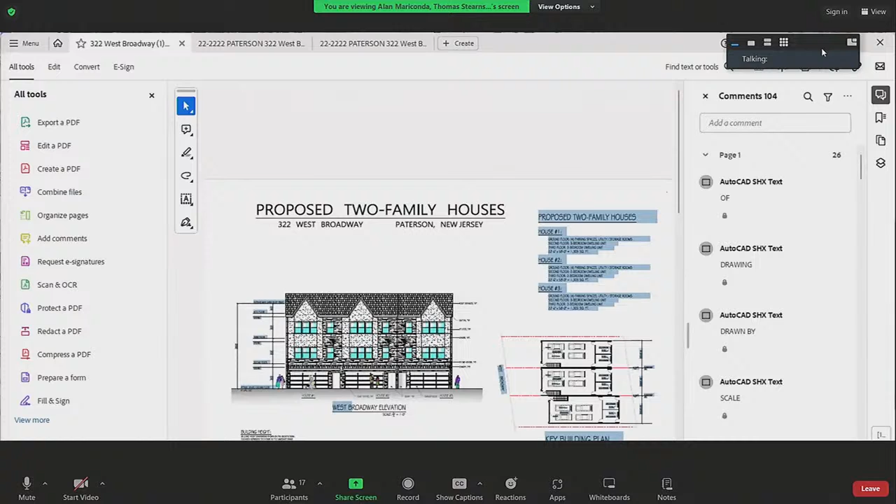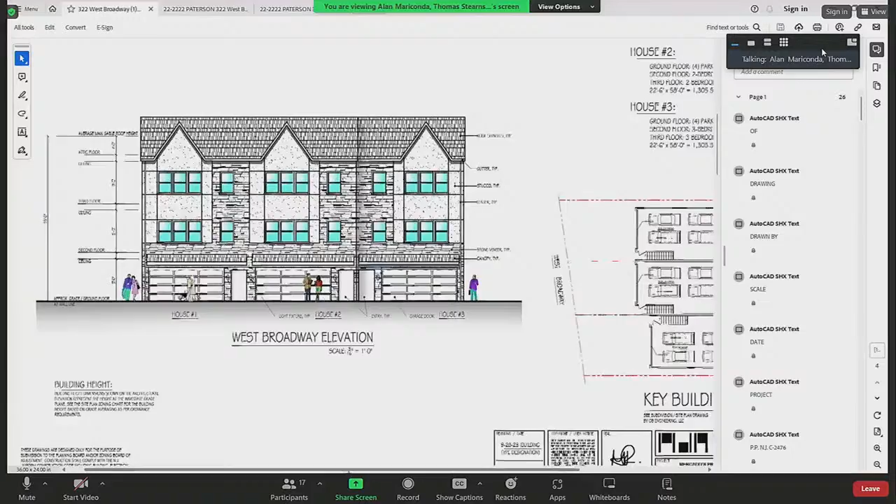Commissioners, you're looking at the first sheet of a set of drawings dated 11/15/22. Sheet number 1 shows the front elevation of the structure itself. There's actually 3 individual 2-family houses attached, as you're seeing what we have now. On that drawing, in the lower right-hand corner, you'll see a key building plan. Mr. Stearns is here and will later review the site plan itself, but this key building plan shows the 3 two-family houses, labeled as house number 1, house number 2, and house number 3.

The property is on the east side of West Broadway, south of Burhans Avenue, and as Mr. Deutsch indicated, it's in an R2 zone. The property has 7,360 square feet of lot area. It's trapezoidal in shape, as you can see from the configuration of that key building plan, with respect to the red line Mr. Stearns is showing right now.

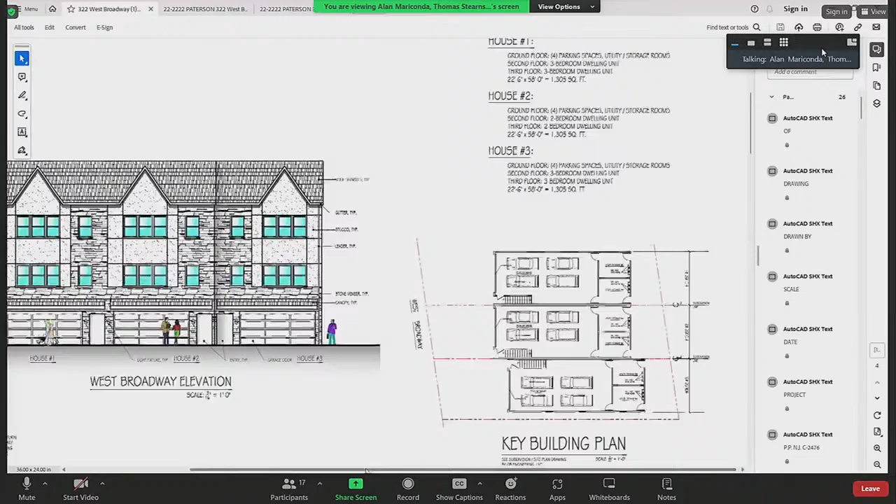You can see from the front elevation we are providing a 4-car garage for each of the 2-family homes. There will be 3 stories, as shown on the drawing. The total height is 35 feet, which does satisfy the height allowance in the R2 zone.

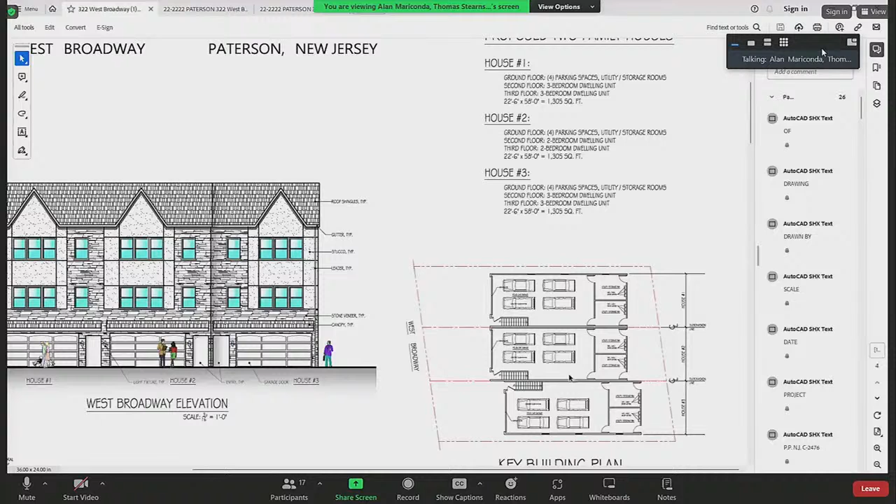As you can see from the summary on the upper right-hand corner of the sheet, we are proposing two-family houses, with a description of house number 1, house number 2, and house number 3. It's a combination of 2-bedroom and 3-bedroom apartments. The interior two-family house, house number 2, which is in the middle of the two outer ones, will have 2-bedroom units on each of the second floor and third floor. So that's what the front elevation looks like.

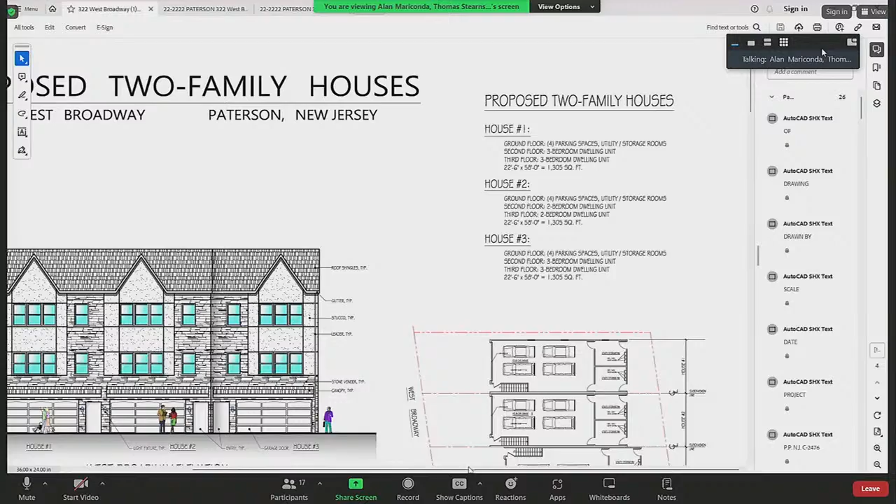You'll see that we are providing a stone veneer with a mixture of stucco as well. The roof will have typical asphalt shingles, as you can see from the drawing itself.

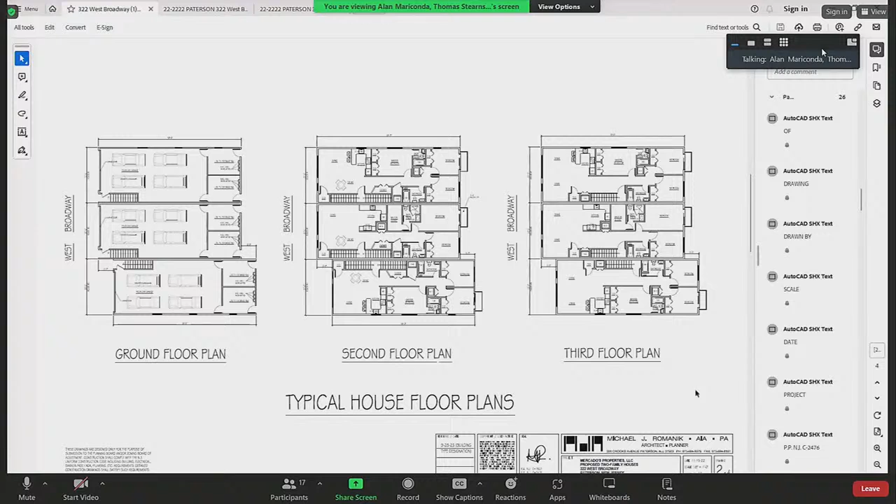Commissioners, if you turn to sheet number 2, you'll see the typical layout of each of the levels. To the far left is the ground floor, and as Mr. Deutsch indicated, each of the two-family houses will have 4 cars within the garage itself. There's also a rear area with exterior doors leading to the rear yard, which will accommodate utility and storage areas for each of the tenants.

The second floor, shown in the middle diagram, shows the apartment located on that floor. As you can see from the notations, the end units, house number 1 and house number 3, have units on the top and bottom that are 3-bedroom units, while the two-family house units in the middle will have 2 bedrooms. The 3-bedroom apartments have 2 bathrooms, with a master bath for each of the primary bedrooms.

The HVAC utility closets are contained within the apartments. There's a combined kitchen, dining, and living area, as you can see on the drawings, and the bedrooms are sized nicely, Commissioners. The third floor is very typical to the second floor, having the same functions.

Each two-family house is dimensioned with a depth of 58 feet by a width of 22 feet 6 inches. On sheet number 3, you'll see larger floor plans showing the dimensions of all the rooms. On the upper part of the sheet is the typical 3-bedroom apartment on the left side. The primary bedrooms also have a bathroom, as well as a common bathroom that serves the other 2 bedrooms and any guests that come to the house.

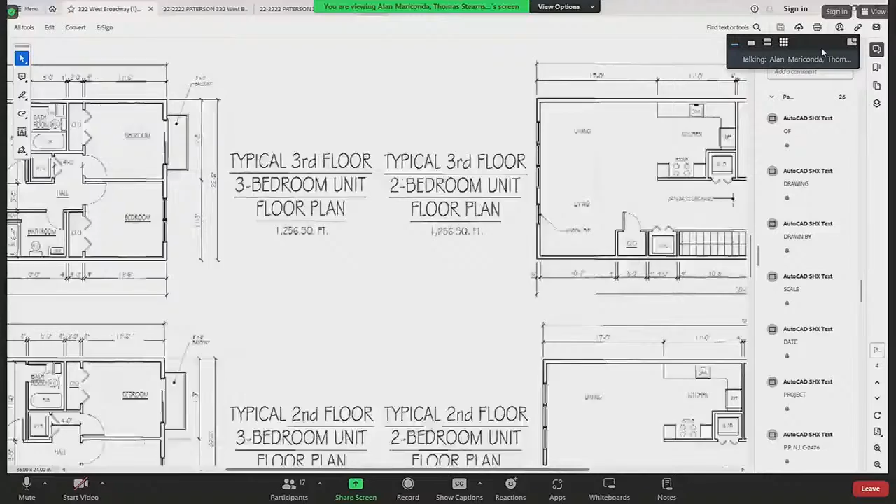The kitchen is combined with the living and dining areas, and there's a larger diagram showing the HVAC on each of the floors. Commissioners, on the right-hand side, you'll see the typical 3rd floor 2-bedroom unit, because that's the unit in the middle, so it only has 2 bedrooms. Unlike house number 1 and house number 3, where you have 3 bedrooms because of the exterior exposure to the outer part of the property.

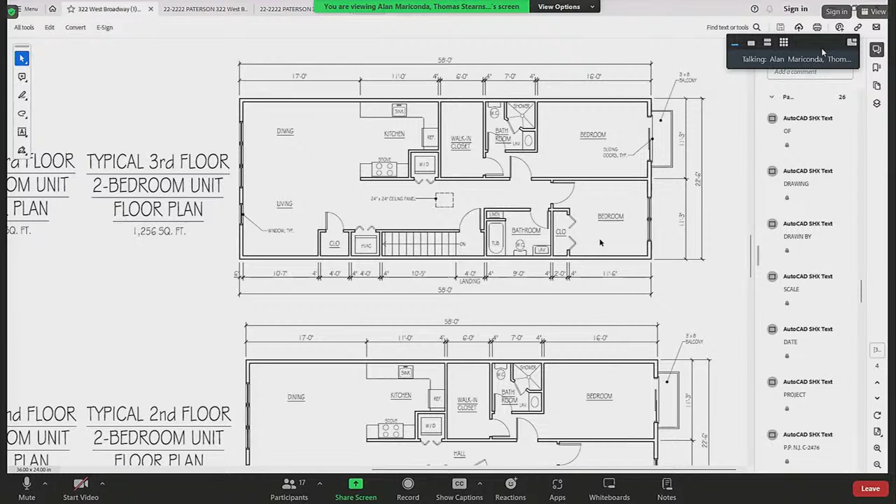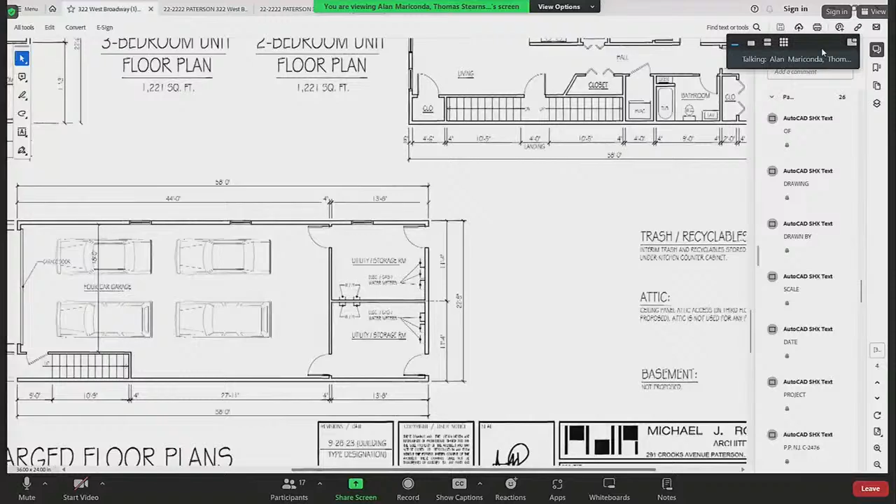Looking at the lower diagram, Commissioner, you'll see that the garages accommodate 4 parking spaces for 4 cars. The garage width is 16 feet, a normal 2-car garage width. To the right side, or the back of the garages, there's a storage room that serves each of the units on the 2nd and 3rd floor. So they have their own specific parking, plus storage and a utility room with the meters, as shown on that diagram.

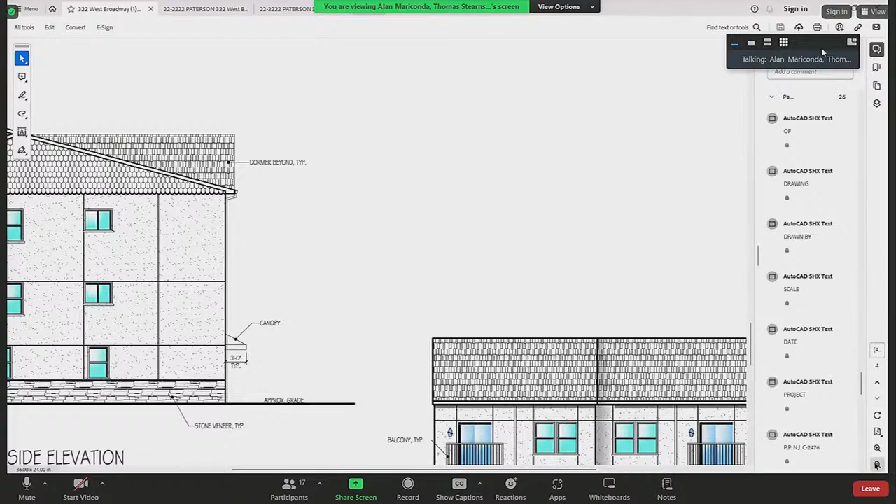The access is towards the rear. There's an exterior door on each of the ground floors of the 2-family houses. That's essentially the layout, Commissioners. Again, the size of each 2-family house is 58 feet deep by 22 feet 6 inches.

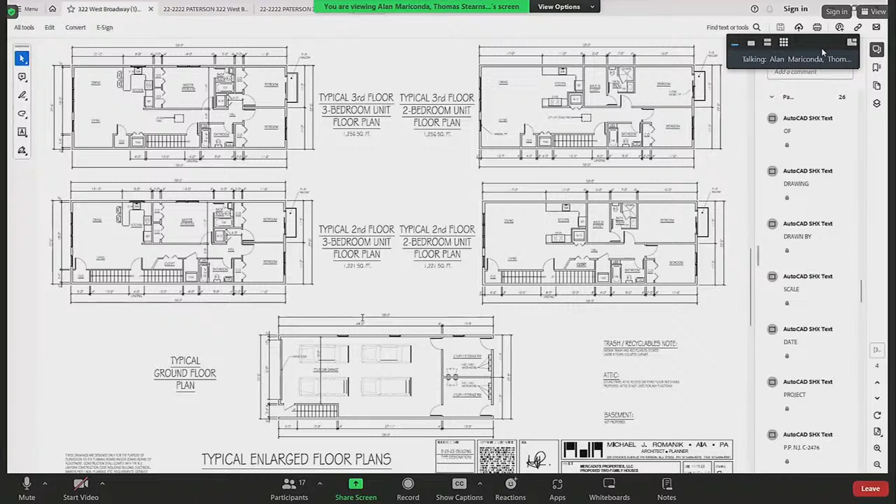Turning to sheet number 4, Commissioner, you'll see the elevations - views of the other sides of the structure as well as the rear. Looking at the diagram on the far right, you'll see the rear elevation, which has the exterior doors that lead from the utility rooms and provide access to the backyards of each of the 2-family homes. We are also providing balconies on the second and third floor apartments, as you can see from that diagram.

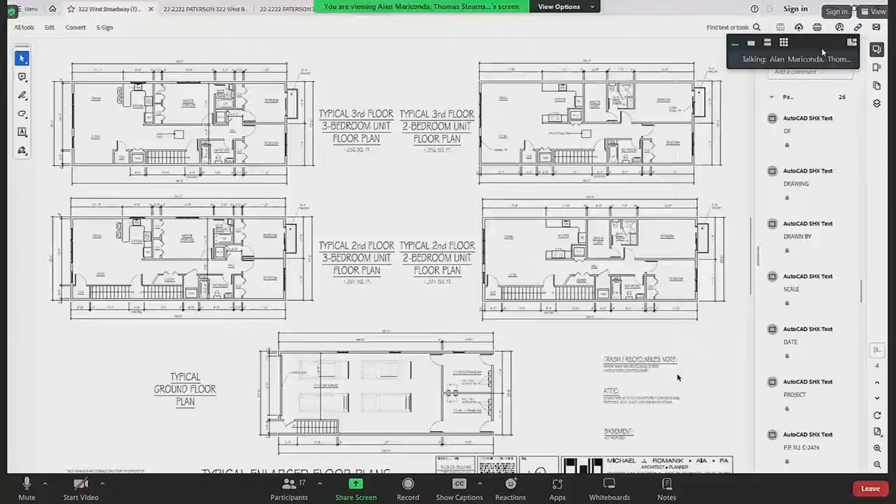Is that usable open space in the rear? Yes, it's not very deep, however there is some open space in the back which can be used as a sitting area and a play area. You'll see from Mr. Stearns's site diagram that house number 3 actually has more of a backyard than house number 1.

The property, as you can see, is shaped like a trapezoid, more like a rhomboid actually, and it's skewed. So you have property lines that are parallel, but they're shaped unequally - it's not 90 degrees. None of the property lines have 90 degree angles. So we are proposing a 3-lot subdivision. Each lot will have approximately 24 feet in width, with an area of about 2,400 square feet or so.

As I indicated, the lot area has a total of 7,360 square feet. So we try to position the units on the property, and Mr. Stearns will describe the easement.

All maneuvering of the cars backing out from the garage will be done on site itself. None of the cars will back out onto the street - it's not designed that way with the easement. There'll be a common easement where you back out fully on the property, then pull head out onto West Broadway. That was done for traffic reasons and congestion; we don't want to create any problem on the street.

So we feel having full access and maneuvering on the site would be beneficial for this particular site. We tried to position the buildings, as you can see on the diagram to the right, and we do have house number 3 offset more, just to give it some variety and take advantage of the trapezoidal shape of the property.

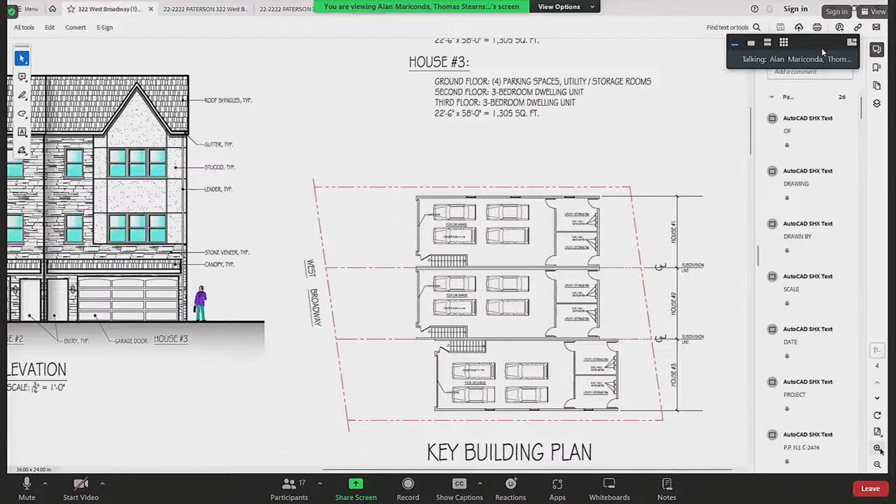So we feel this is a good project. We feel that the density is not high at all. It's based on other properties in the area which have small lots as well, many of them 25 by 100 feet. So we feel that this is most appropriate.

And the building that's on there now isn't the best shape, so we feel this is going to replace it with new housing that would be a complement to not only the neighborhood but the greater city as a whole. We feel that what we're proposing is very complementary as far as fitting into the character of the neighborhood, and again, the neighborhood is a 2-family zone, so that's what we're proposing: 3 2-family homes.

And the existing structure is either in need of rehab or demolition. It's not in great condition. Yes, that is correct. Okay, that's all we have, Mr. Romanik, at this time.

Madam Chair? She's muted. You good? Sorry, I was muted. Okay, I'm going to ask you to bring in and conclude Mr. Romanik's testimony, so I'm going to ask you to bring in Mr. Stearns.

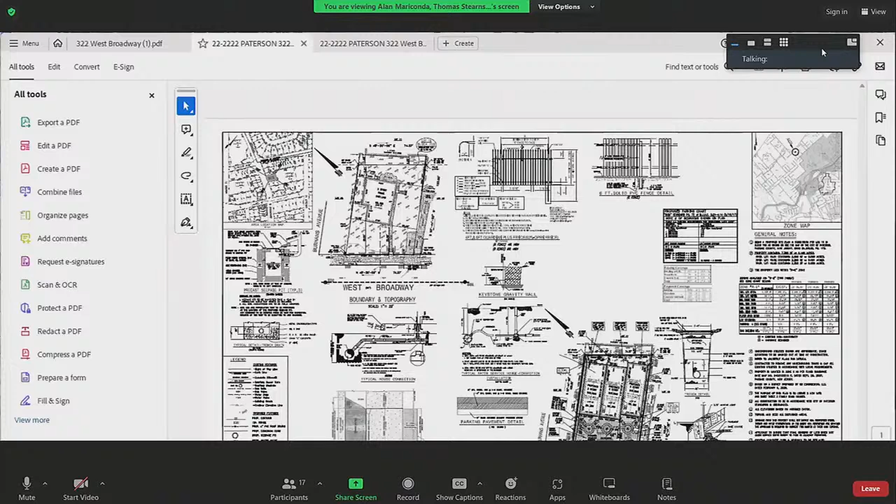Okay, Mr. Stearns, you've had the benefit of hearing Mr. Romanik's testimony and Mr. Deutsch's report, which you've reviewed. That's correct, yes. Could you give us an overview of your site plan at this time? Sure, first I'm going to share my screen, if I may. Can everyone see that? Yes. Okay, let's see.

So this is my site plan, originally dated December 27th, 2022, with the most current revision being 1/26/24, the 4th revision. As was described by Mr. Deutsch and Mr. Romanik, we're proposing a 3-lot subdivision. This lot is on the easterly side of West Broadway, lot 19, block 703, containing a total of 7,360 square feet. We're dividing it into 3 lots.

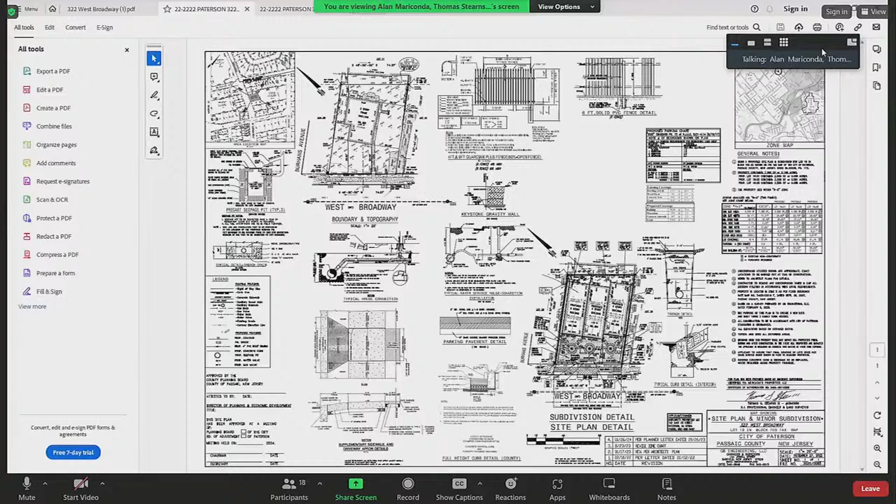The 2 outer lots are going to be equal at 2,555 square feet. The middle lot is going to be 2,250 square feet, the more narrow lot. The two outer lots are 25.82 feet in width, and the middle lot is 22.73 feet. As Mr. Romanik said, we're going to first subdivide these into the three lots, lots 19.01, 2, and 3.

We're proposing dwellings on each of these. As Mr. Romanik said, these are going to be 22.5 feet wide by 58 feet. For the positioning of these, we gave 3.05 feet as outer side yard setbacks on the two outer buildings, and the middle building's walls will meet, with fire rated walls on those.

The front, what we did to promote parking and maneuvering, we pushed the buildings back. So we have the closest front setback at 27.12 feet on our middle lot, and that will give us maneuverability for these cars to pull out of the garage. Then, as Mr. Romanik said, they'll be able to pull out forward onto West Broadway, which is a busy county road, so they won't have to back out into the road.

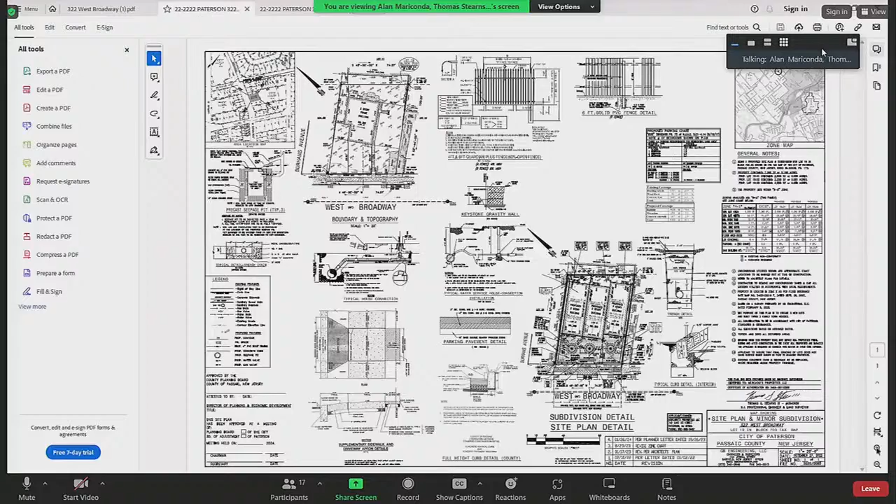We're also providing, on the first level, 4 parking spaces per unit, so we are fully compliant with our parking. The existing lot, just to go over briefly, I'll zoom in to the top left corner of the sheet. We had an existing dwelling, approximately 1,500 square feet, closer to the northerly side of the property. The grading on the site was relatively flat, going from 103 to 102, so a 1 to 2 foot grade change, which is relatively flat. There's no drainage facility on the site.

So there's the existing dwelling and driveway on the site, and any concrete features would run off onto the site and onto adjacent properties, mostly toward the rear, and some into West Broadway.

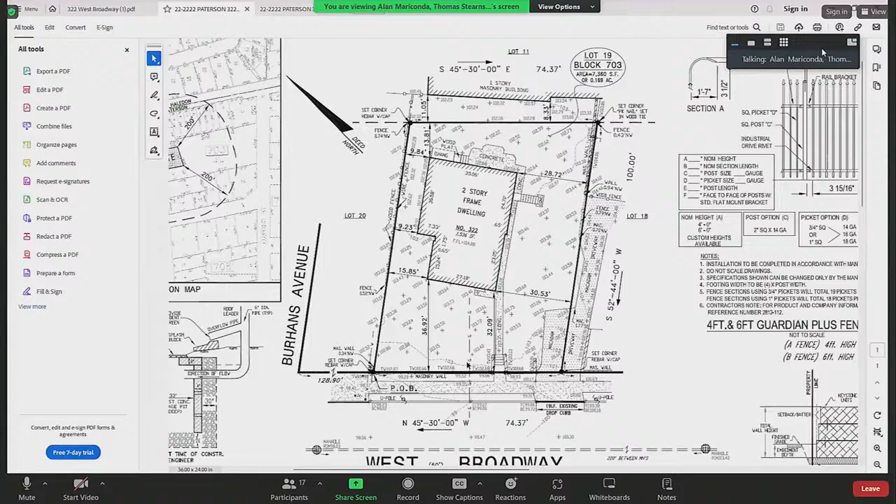So what the proposal is, I'll go down to my site plan detail. We're proposing 3,000-gallon seepage pits in front of each dwelling, one per lot. These pits will capture the entire roof runoff from each dwelling during a 2.5-inch storm. In addition, we're going to capture the turnaround maneuvering driveway in the front, which will be common to each dwelling. That entire driveway will be captured with a trench drain, so no water will go into West Broadway.

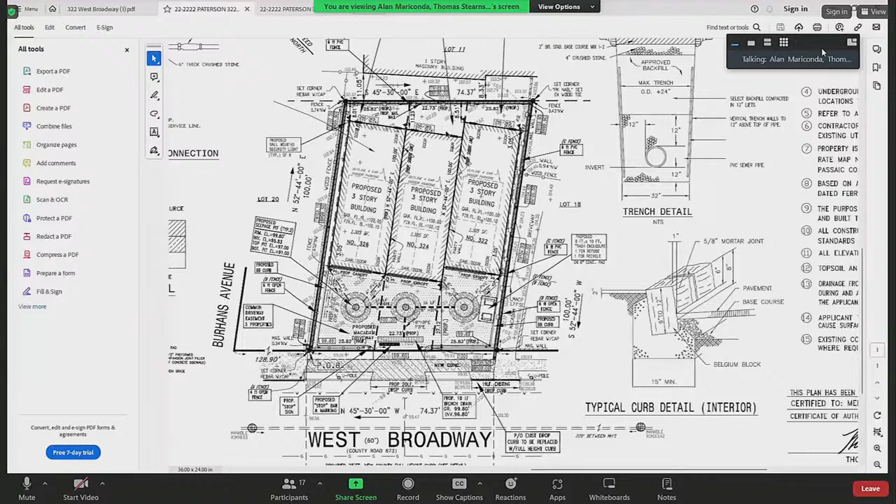So the only uncaptured water on the site is that rear area, which will be our open space area and a lawn area. That'll percolate into the ground as it currently does. So it'll be an improvement from a drainage standpoint on the site, and it'll be a beautification.

The site is in disrepair currently. As we said, we have a 20-foot drop curb in the front, and that will allow us to enter the site and maneuver into the garages. I have another detail I'll show everyone for our easement detail, but for now I'm just going to go through the variances quickly.

Mr. Deutsch did already, but basically we have common variances for each lot. Where 5,000 square feet is required, we're asking for a lot area of 2,555 square feet and 2,250 square feet. Lot width, 50 is required; we're at 25.82 for two lots, 22.73 for the other lot in the middle.

Front yard, we do comply with the front yard, 20 is required. And to make that driveway area possible, we created that open area in the front, so we're compliant. Side yard, 4 feet is required; we're at 0 on the side yard. Side yard both, we have 3.05 on both sides and 0 in the middle.

Rear yard, 20 is required; we're asking for a variance, the smallest of the three is 8.01, the largest is 8.23. Floor area ratio, we're compliant. Lot coverage, 40% is required; we're at 51.1% on the two outer lots and 58% in the middle lot. Parking, we comply with 4 spaces per unit, and we comply with the height as well.

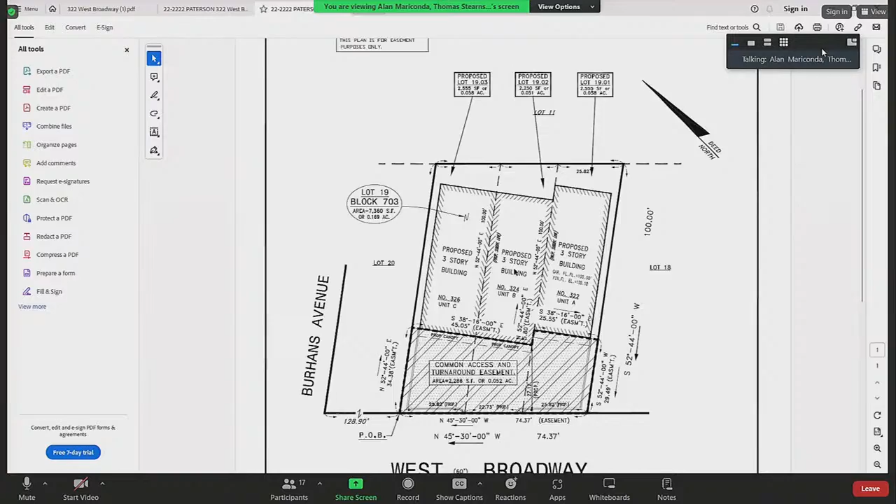I'll just briefly, I'm going to stop sharing this screen and go to my other one. I may be able to switch over. Here we go. Can everyone see that? Okay, so this is my easement plan.

This depicts the property as a whole and the subdivided lots with the dwellings shown on them and the driveway. This area in the front will be deeded for common access and turnaround. That will be submitted and filed with the subdivision deeds for the property, so each lot will have a deeded access to this turnaround area.

Anything else? I think that would cover Mr. Stearns's testimony, Madam Chair. Yes, that would cover Mr. Stearns's testimony at this time. Okay, I'm actually going to, I think this is the time to open it up to the public.

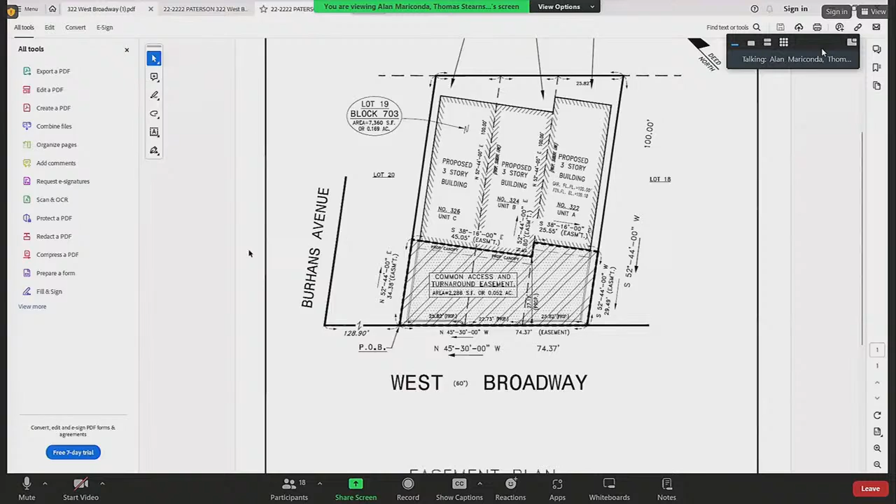322, Mike can handle it. On the left side - if you look at the front elevation, you'll see the roofs are sloped from the front to the back, so there's no sloping to the left or right. Any snow there would fall towards the front or back slope of the roof, not to the side. So everything slopes towards the front, and there wouldn't be any problem. There's a side yard anyway, so it would not go over onto somebody else's property.

Someone's going to have to speak up a little bit. It's getting harder and harder to hear anyone.

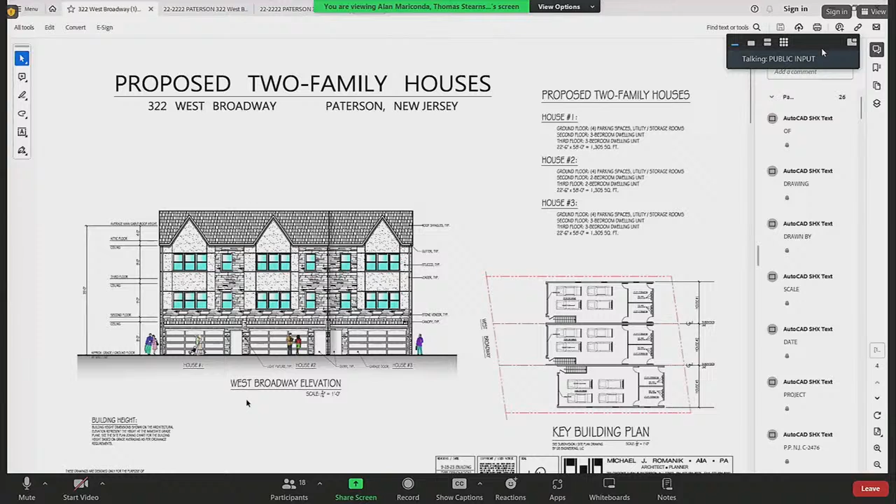Right now we have only one extra family in that house, and there's a lot of people visiting every day, so there's a lot of guest cars. We don't have much parking on the streets. How are you guys going to handle that?

Well, if our proposal is granted by the board, there's going to be a dramatic change in terms of our development, providing fully required parking on site. Whatever is going on there with respect to the existing tenants will no longer be the case. We're designing state-of-the-art 2-family houses, 3 of them, with on-site parking meeting the city requirements. We understand the general parking concern in the neighborhood, but our intention is to improve not only our site, but have a positive impact all around.

The other concern that I have is these 3 septics that you want to build - septic tanks. There are 3 tanks in the front of each property. These are called seepage pits, and the purpose is to capture the rainwater runoff. All the rainwater that runs onto the buildings and the driveway will be captured in these. It's not a septic tank, it's a seepage pit - just water runoff.

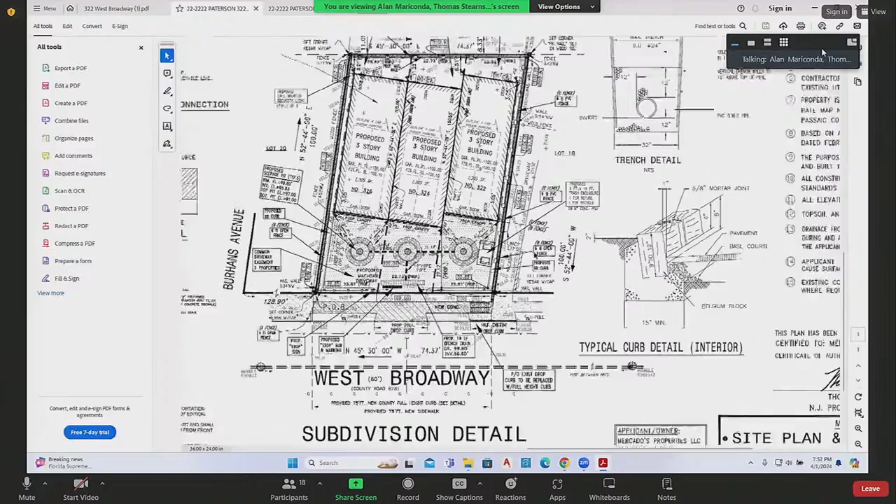Sure, Commissioner. If I could, Madam Chair, if I could share my screen again? Yes, please, thank you. Okay. Sorry about that, we're almost there. So here we go, this is my subdivision detail and site plan detail. Can everyone see that? Yes.

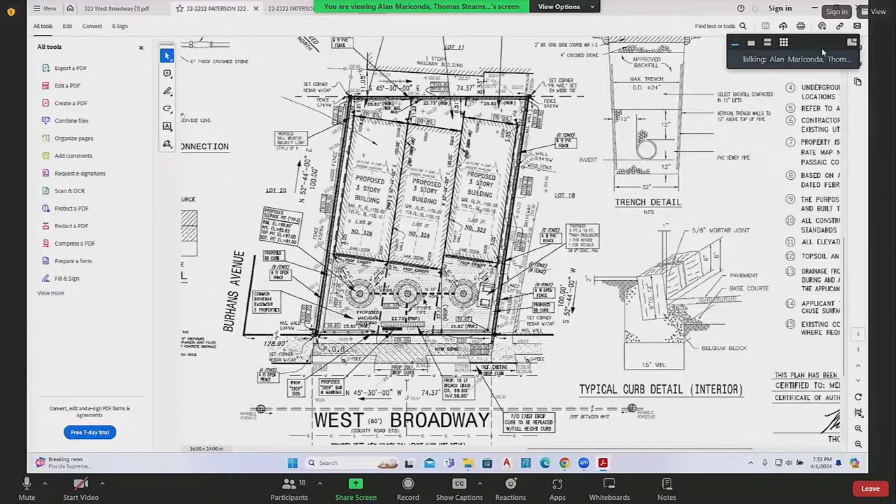So here we have our lot in question with West Broadway, the curb. We have our sidewalk, our entryway. In the driveway area in the front of the lot, we're proposing 3 seepage pits. These are designed to capture the rainwater runoff from the roofs of each unit of each building. Each one has their own, so what they do is they capture the roof runoff from each one. In addition to that, we have a trench drain in front at the opening of our driveway, and that picks up all the water from the driveways, the common drive. So that common drive will go into that middle seepage pit with a pipe. And then in addition to each lot having their own and the roof leaders going to each one, we link the 3 pits up. So it provides maximum storage for the site.

So there, I could go to the detail of the pit as well. Let me ask you something, Mr. Stearns, they're not really visible, do you see them, they're circles. See the circles? Yeah, I know, but you don't really see those circles in front of the house, do you? Oh no, they're underground, these are buried. Right, they're underground, correct. Okay, and they have an access port, so they'll be accessible for cleaning and such.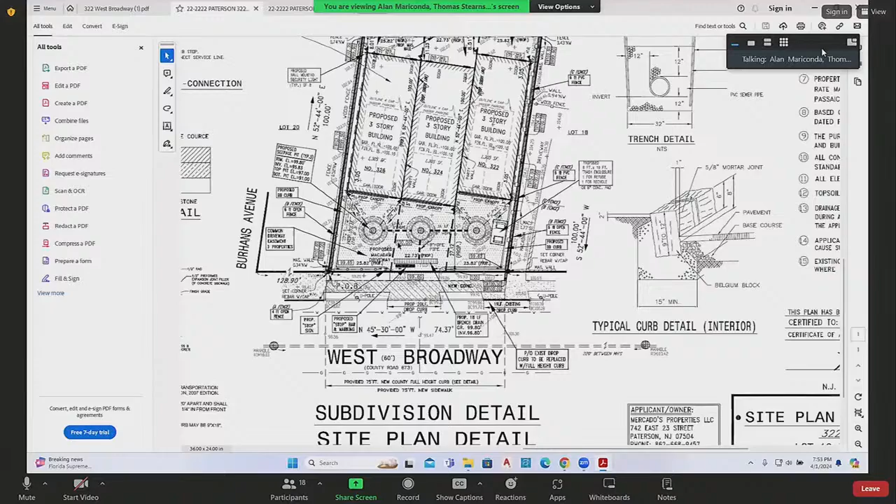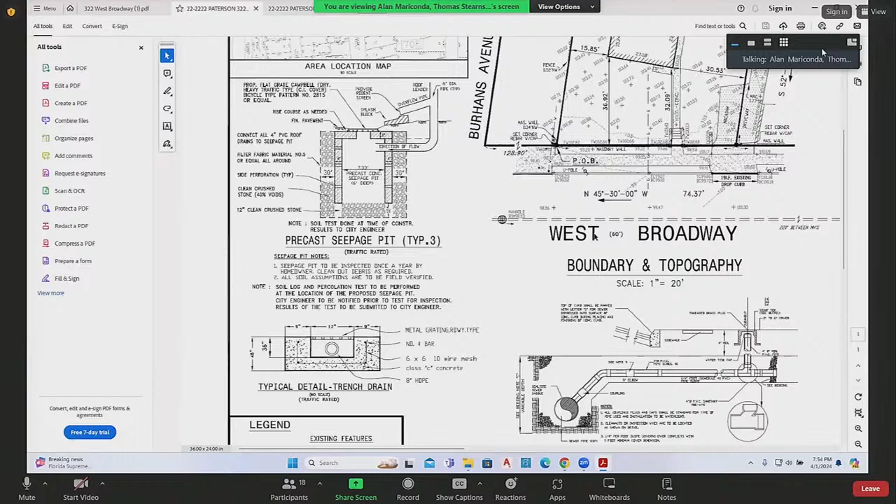But let me go to, I have a detail on the plan as well. Okay, so these are buried pits. If you ever pass by a construction site during construction, you'll see the tanks that are on the surface sometimes before they install them. And these are big concrete tanks. What we do is we have filter fabric and we have stone around them, almost 2.5 feet of stone around the perimeter of the tank. And then you have the tank itself. These are large tanks, so the water goes into the tank and percolates out into the stone and then eventually gets into the groundwater system and recharges the groundwater. That's the purpose of it. So everything's piped underground, it's not visible at all. It just works. What you don't see is the water running off the site onto Broadway. So it'll be captured on the site.

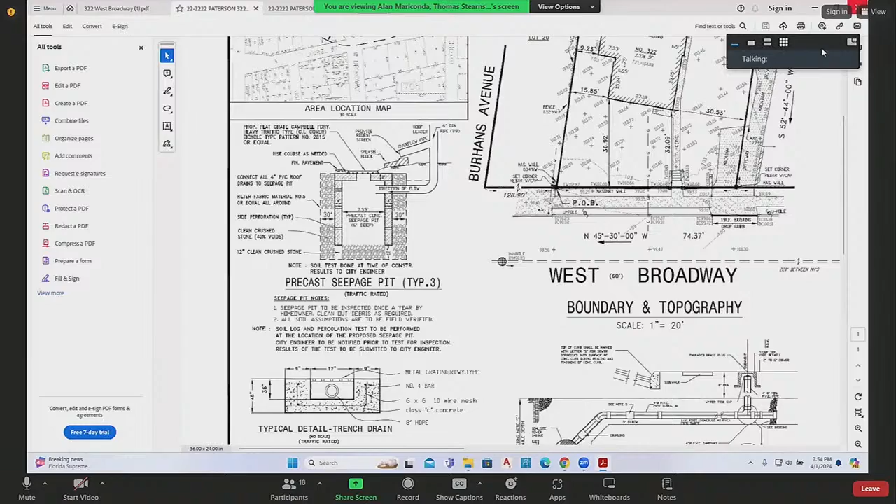Commissioner Roman? I'm good, thank you. I just wanted to make sure it wasn't as visible. Right, thank you, I kind of thought that's what you were thinking. They were there in the front, they were visible, but they're not. You're welcome, so that's a good thing.

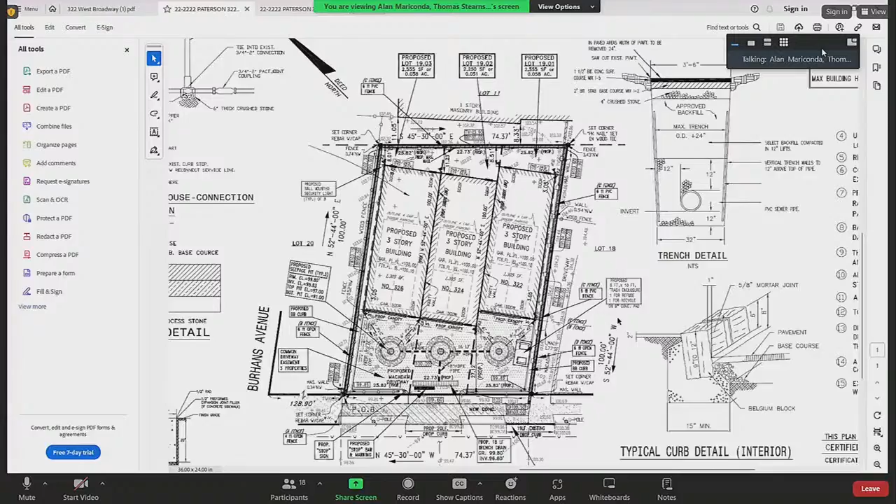So I'll zoom in here. On the right side of the driveway area, in front of unit 322, we do have a refuse and recycle area here. So it'll be a fenced in area for the garbage, and the garages will - they can exit the garages here and maneuver. But we do have a site-specific refuse and recycle area.

Okay, so do we need to change this? It's in paragraph 18. It says prior to the trash being taken out, taken to the exterior trash area, trash and recyclables are to be stored under the kitchen counter cabinet. So I believe this covers it. They can utilize this for storage of refuse. Wait, what paragraph? 18. I didn't see that, which letter is that?

Well, that's what I saw. Oh, I see it - it is prior to trash being taken to the exterior trash area, trash and recyclables are to be stored under the kitchen counter cabinet. Okay, but Mr. Stearns, you're saying that they could take it out at any time because that's going to be outside on the property, correct? That is correct, yes. Okay.

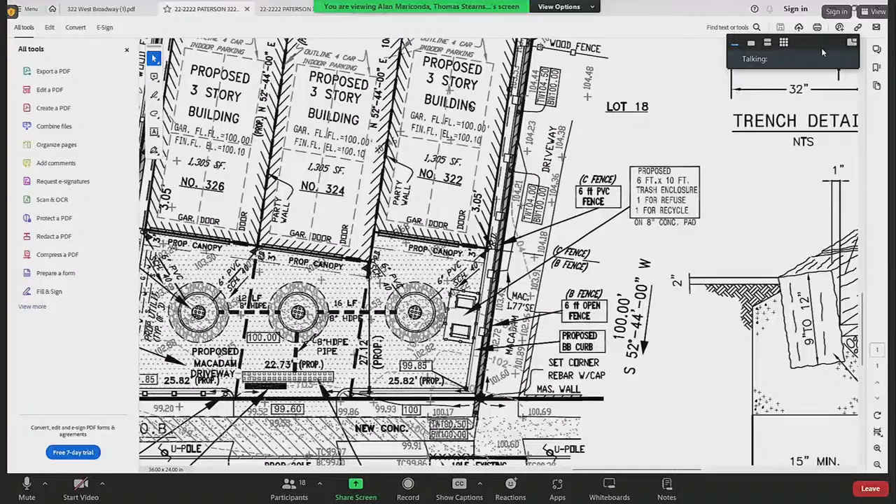I'll stop. Okay, commissioners? I'm sorry, Madam Chair, how about the cameras for the building? Well, this is more of a private property. I don't know, if it were me, I would like to have cameras on the outside of the building because they're very close to Broadway. You get a lot of traffic walking around. I don't know, Mr. Stearns, Mr. Romanek, do you think that's feasible? Yeah, my client would have no problem with that, Madam Chair.

I'm back in. Okay, just so long as it's not - I mean, we all know the rules attached to video cameras. You cannot be facing them at somebody else's property, in the windows and whatnot. And it would have to hopefully be hooked up to the Paterson Police Department if possible. Okay.

I have another question, I believe, Commissioner Amar, this is to Mr. Aquaviva. Being that this is like 3 two-family houses, 6 units, should we consider this still a private property, like a multi-residential building or? I don't understand. No, well, it is an apartment building. I already asked, it is not.

With all due respect, this is not a 6-family apartment building. These are side by side, 3 two-family houses connected with common areas, but individual 2-family residences. They're rental units, but characterizing it as a multi-family building, as the commissioner did, is not accurate.

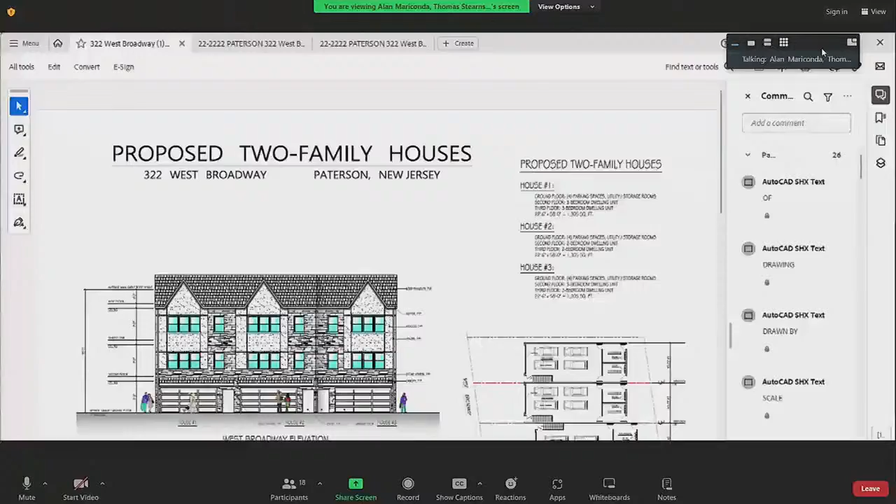Yes, fire alarms. None of the houses are connected to each other. The walls separating them are fire-rated walls. If you go to sheet number 2, Commissioners, you'll see each of the units have their own separate walls. There are no common walls proposed. Each house has its own walls and they do not rely structurally on each other, and there are no common firewalls. They each have their own fire-rated wall assemblies. You see what I mean, Commissioners?

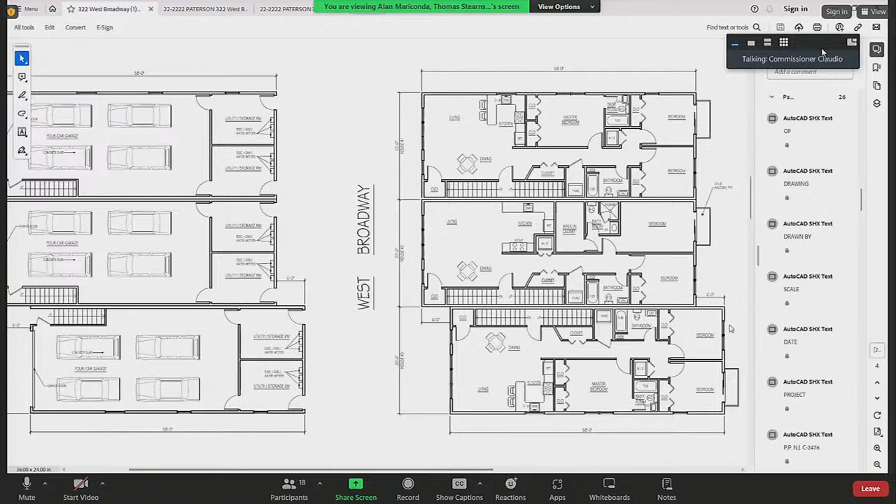Separate walls. Okay, I see. Yes, okay, I see that. All right, thank you. Another question.

Are e-bikes not supposed to be allowed on these garages, am I correct? We couldn't understand you, sorry. No electric bikes going to be allowed on the garages, am I correct? Electric bikes. No bikes, electric bikes, no electric bikes anywhere. No.

I want to go back to the fire issue. That all has to be inspected by the city of Paterson anyway, am I correct, Mr. Mariconda? Sure, the final construction plans regarding the firewalls has to go through the full building and fire department review. Right, it has to be up to fire code. Okay, yep, all right. Thank you. You're welcome. Any other questions?

Okay, I'm going to open it back up to the public for 3 minutes only. Please use the timer, Madam Secretary, and they can make their comments. I think their comments are probably going to be like what we heard earlier, parking related, how they're going to pull out of the front yard, backyard and so forth. I understand that, and I think we all understand it by now. But I'm going to open it up to everyone who had called in, and anyone who wants to make a comment will be given 3 minutes to do so. So please call in from the public now if you'd like to make your comment, and dial star 3.